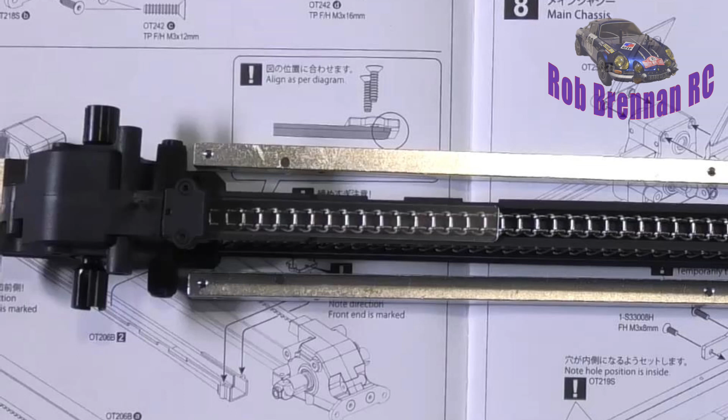Today we're going to be opening parts pack B, or should I say I've already opened parts pack B, and we're going to do steps 5 and onwards until I get to the end.

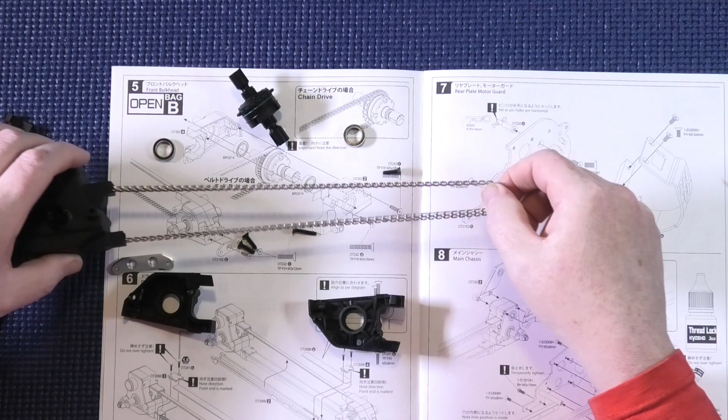Step 5 is making up the front differential and getting the chain on. It should be fairly simple, he says, not being able to work out which one's which.

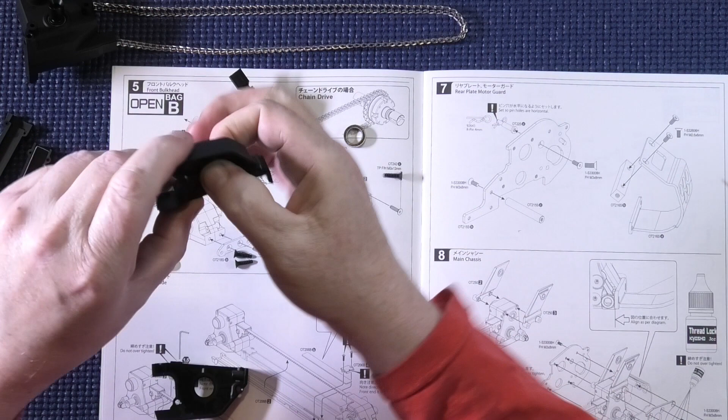Is that one? Yep. So to start with, it's just quite a simple case of inserting ball races into each side of the diff housing.

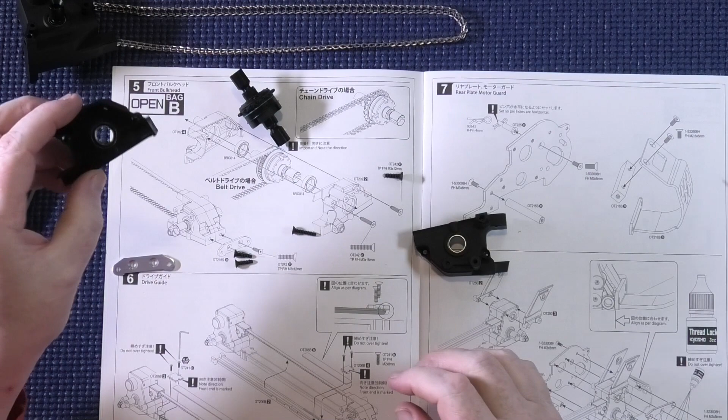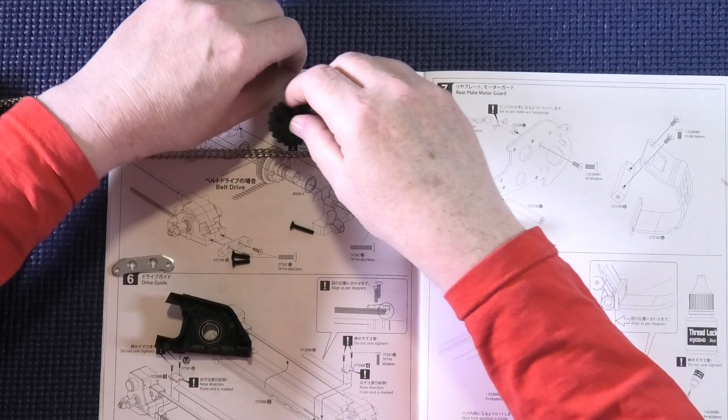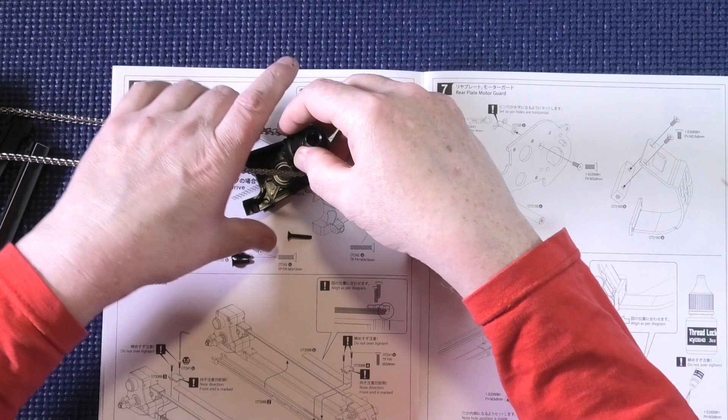And then the slightly more difficult bit is we've got to somehow, with only 2 hands, and also noting the direction of the diff, put the chain on, something like so, and then slide the diff in.

There we go. We've then got to join the other half. Wow, that's a tight fit on that bearing. There we go.

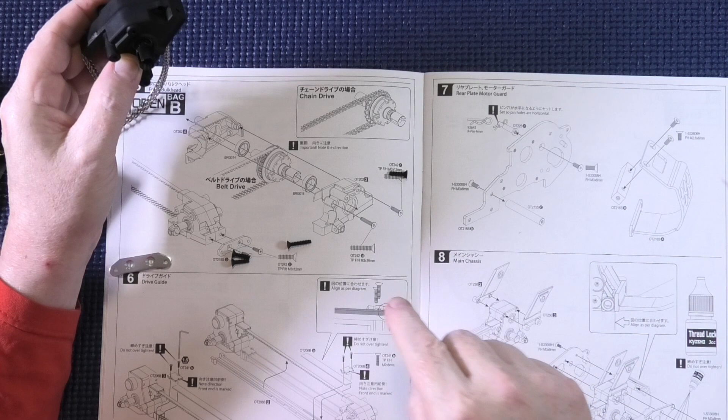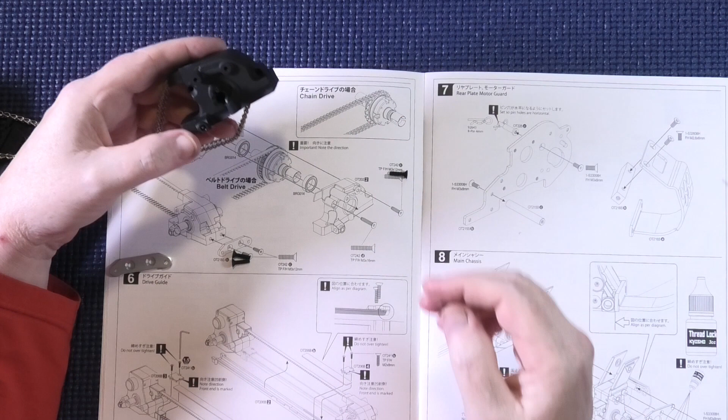And then we've got 2 screws so far. First one is a 16mm, which, looking at this, goes in there, does it? Yep. And the other side is a 12mm, both self-tappers, both countersunk.

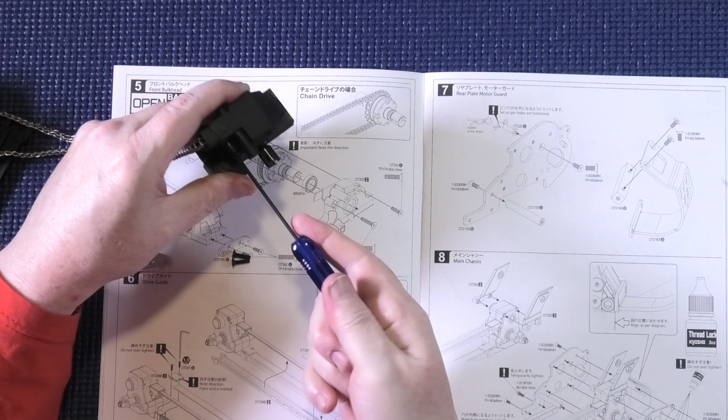I do quite like the idea of these being hex screws and bolts.

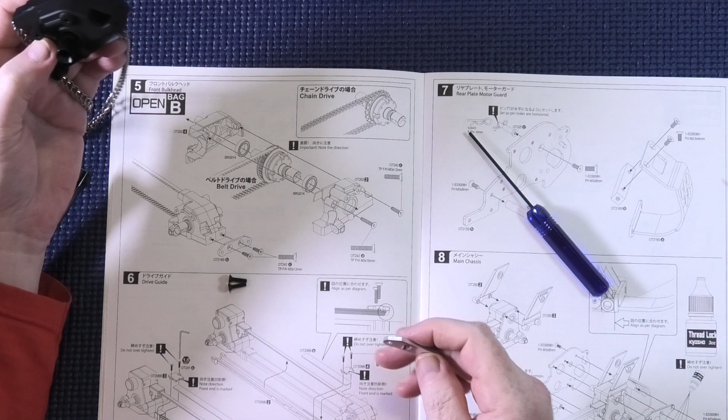And then we've also got this part here, which they're calling - I can't read because I haven't swapped my glasses - but that goes there with, again, 2 12mm self tappers, so that should hold the rear of the diff together.

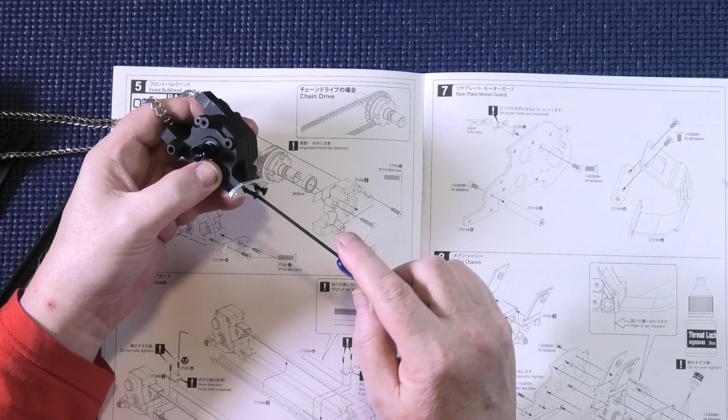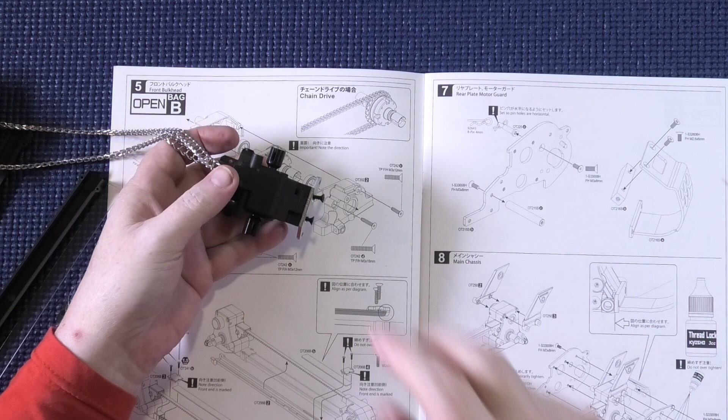And once you've tightened them up, you could move on to step 6. So I'll carry on and do that and join you shortly.

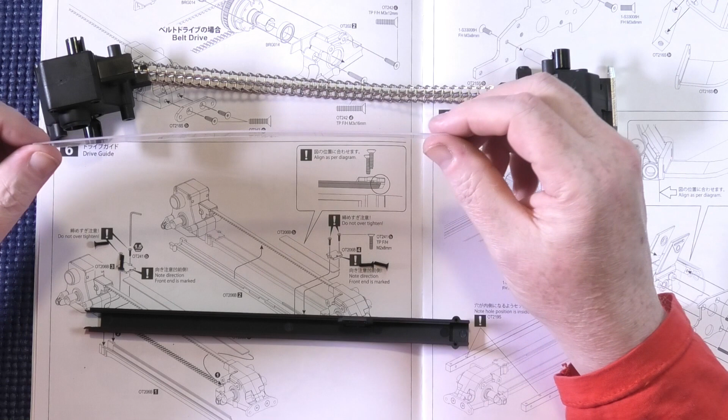Step 6 is installing the drive guides, and we've got a top and bottom one. I think that's the top one, and this one is the bottom, and we've got a long strip of hopefully polycarbonate.

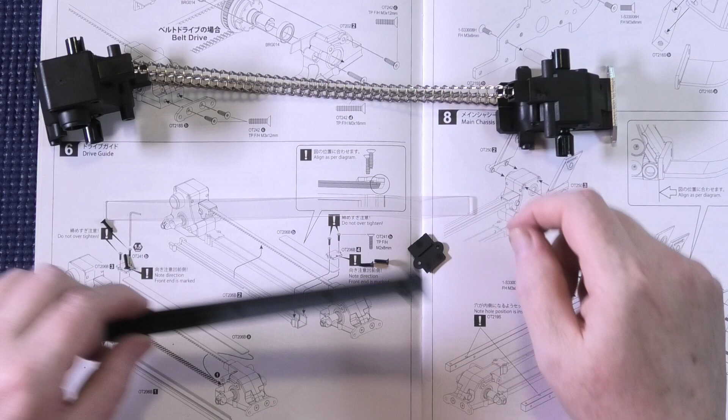And a retaining plate, I would imagine, and the bottom of the guide itself. And from looking at this goes on something like that. I'm assuming that just clips in like so, and then that possibly slots in.

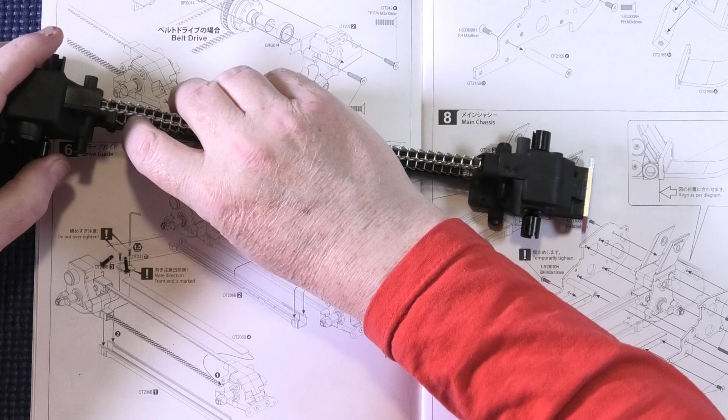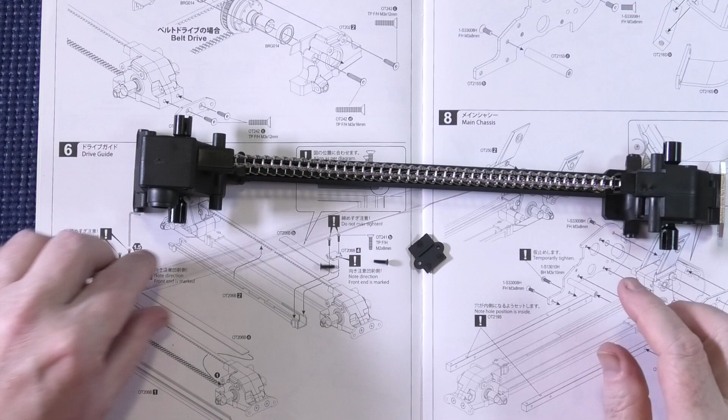Could do. There we go. And this little beast, I believe, sits on top, and I do apologise if my horrible bald head is getting in the way. There we go.

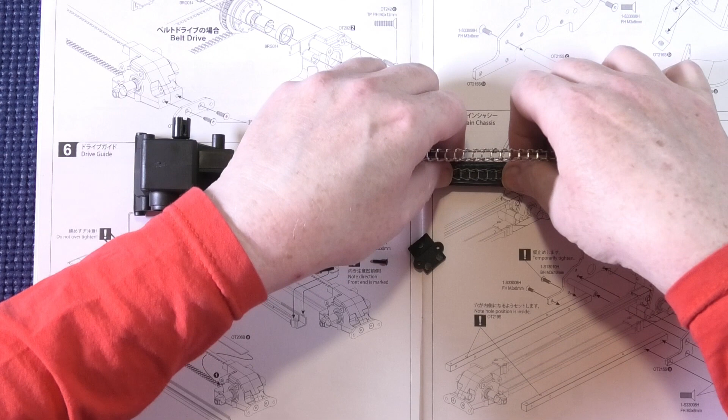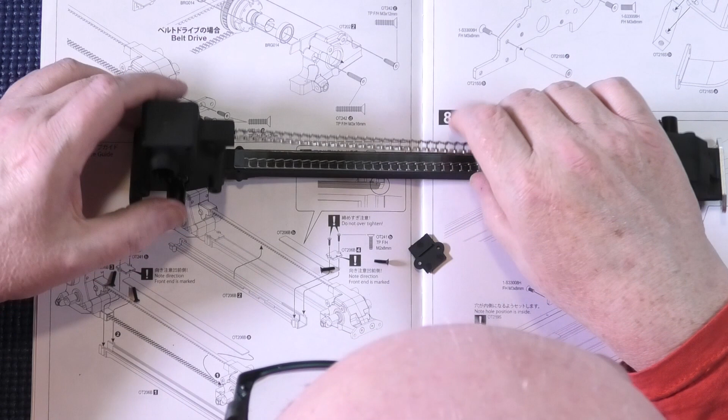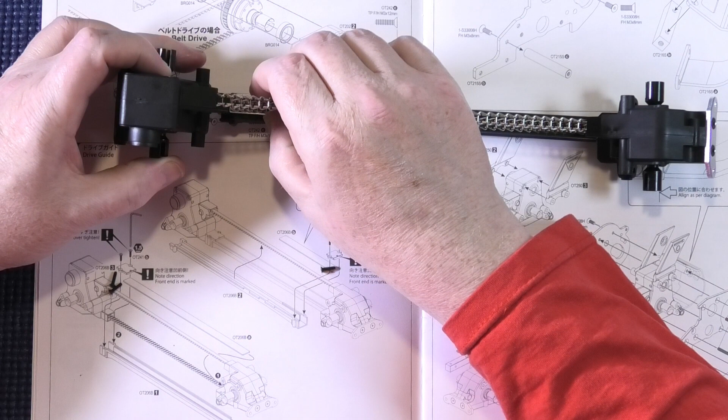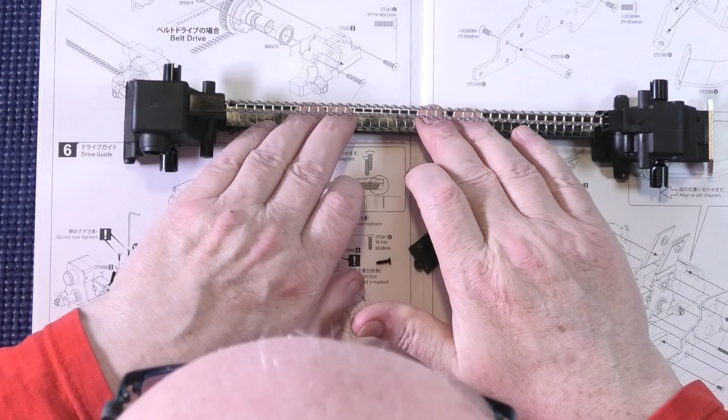Now, what I'm not sure of at this moment in time is, I think, this polycarbonate - does it go in? No, it won't sit inside, so it's obviously meant to go on top. Possibly something like so. Seems a bit weird.

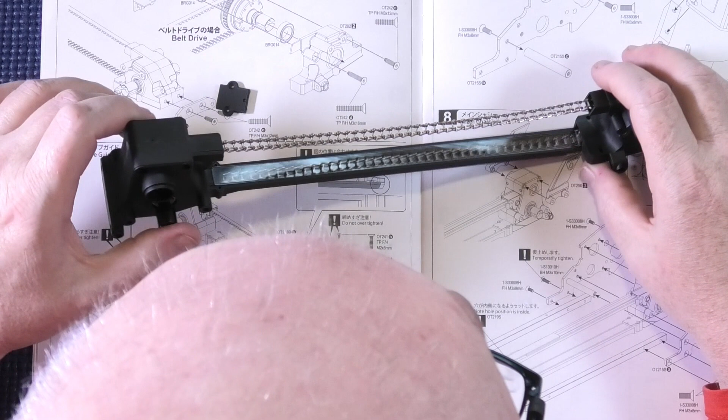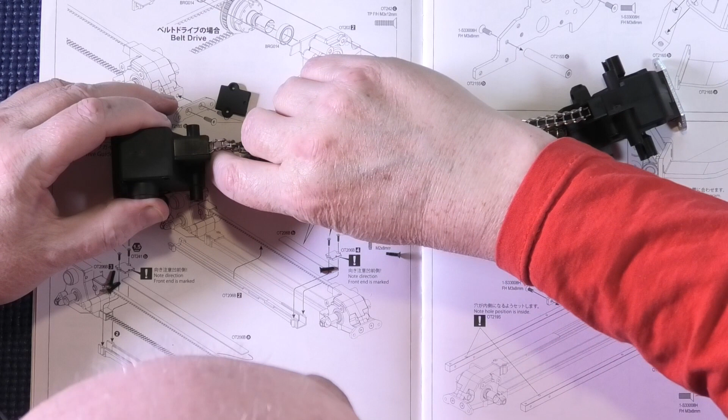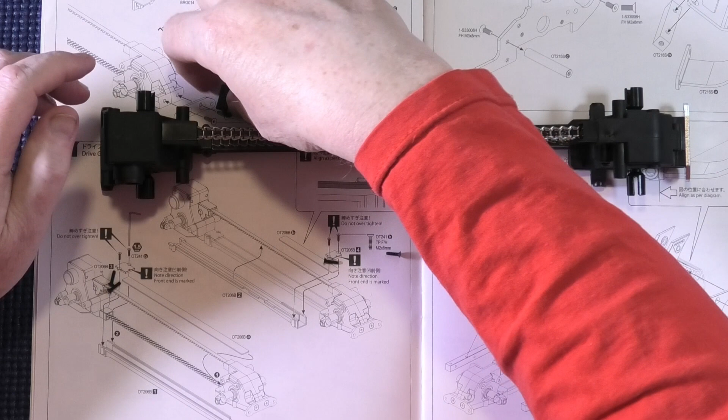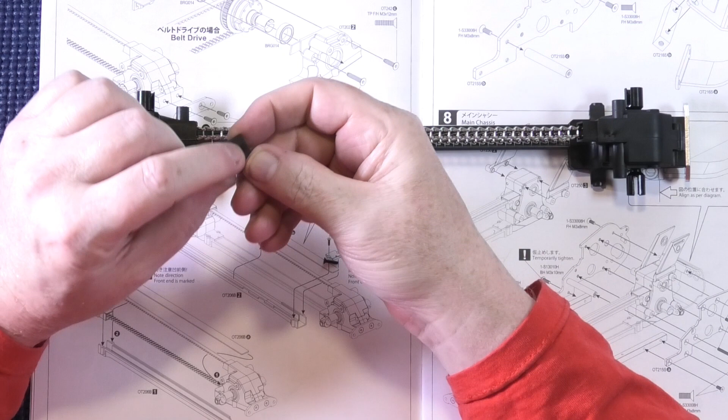I think it slides forward. Whoa! Just something round about there. Yeah. Now this one has something sticking down in it.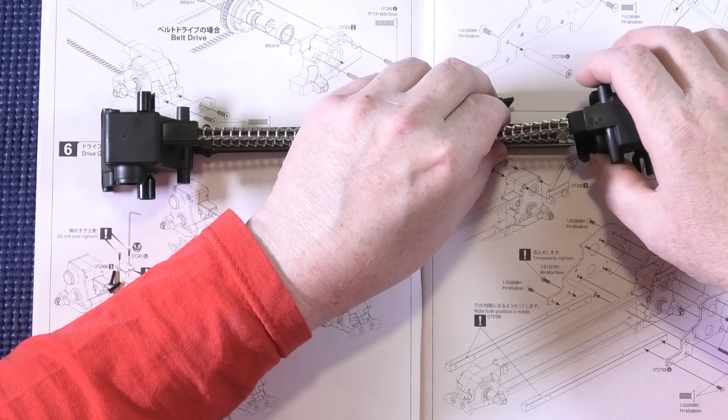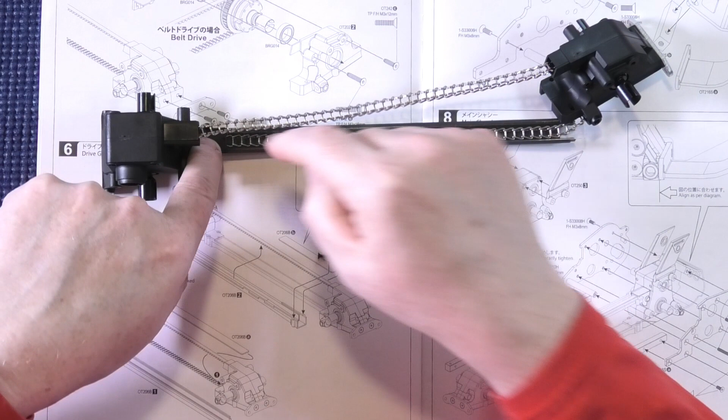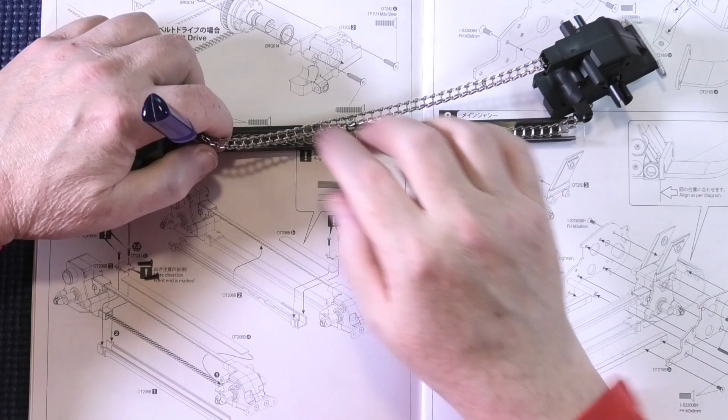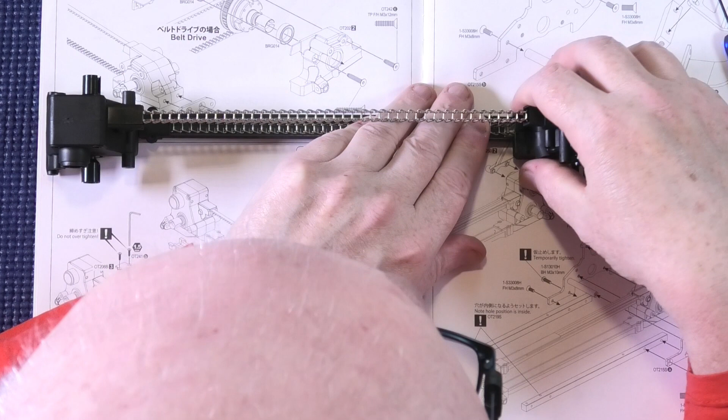I think this is blooming tricky, this is, if this is what happens. Right, so I do think you need that gap. Right, so let's see if this works then. Come on. Right, so that's that one.

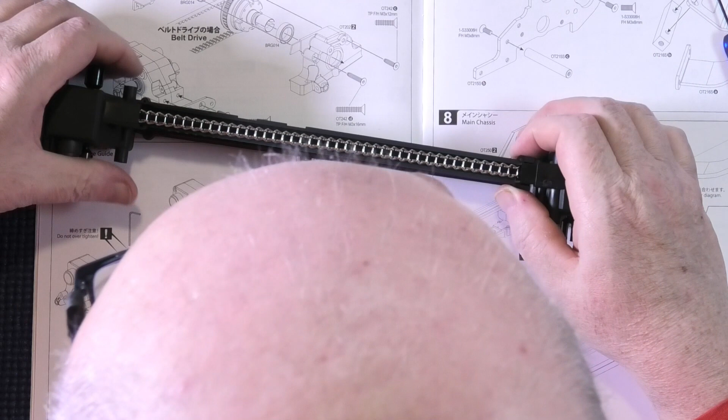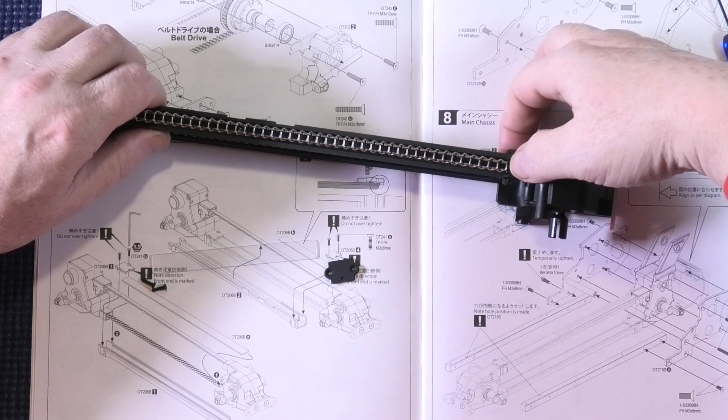And then for the top, we've got this one, which, by the looks of this, is going to be a tight fit. Well, that can't be right, unless you twonk - you got it the wrong way blooming round, don't you?

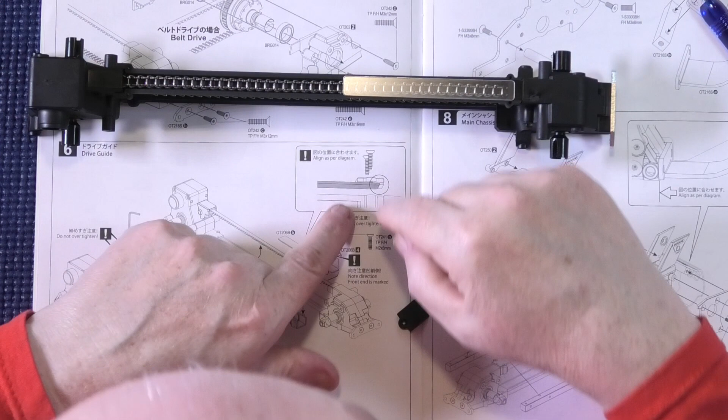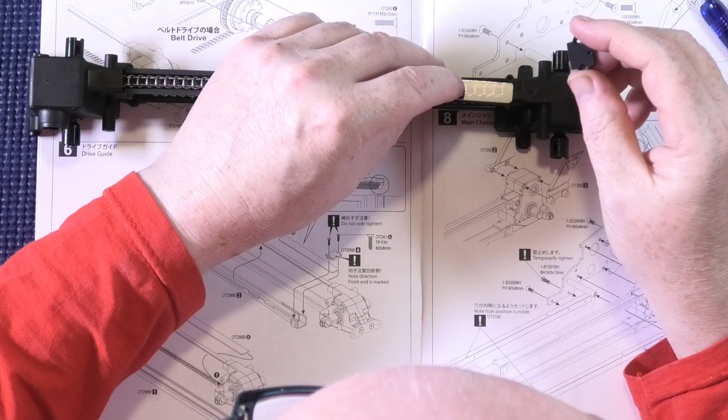Oh, look. Oh. I don't know. Now there's a note here which to me shows you're putting this bit of polycarbonate over there and then screwing that down.

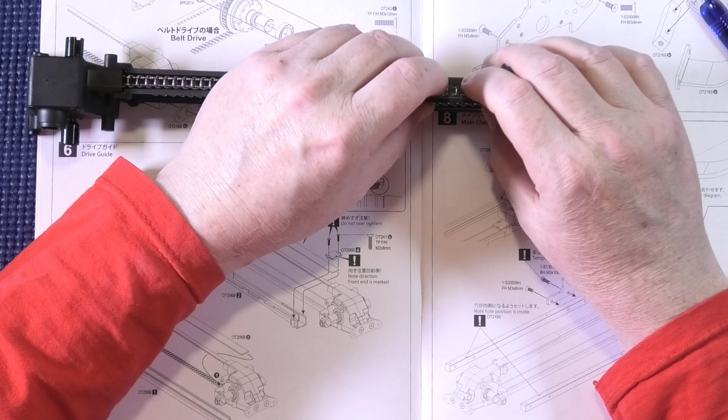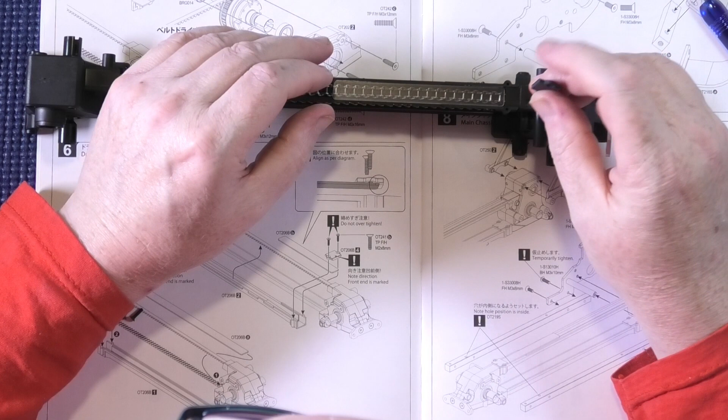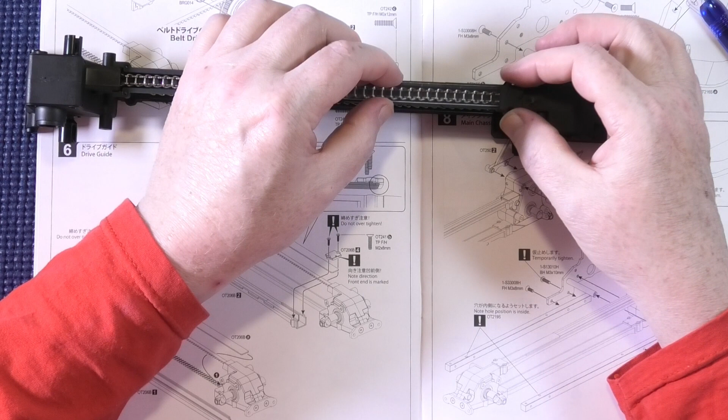Because I think if you put it in there, where I think it should go, and clip in, but then there's basically nothing holding that in, which seems a bit crap. I don't know why they couldn't have done it all the way along, like the bottom one, and why there's that channel either side. But hey, we'll do it as it says to.

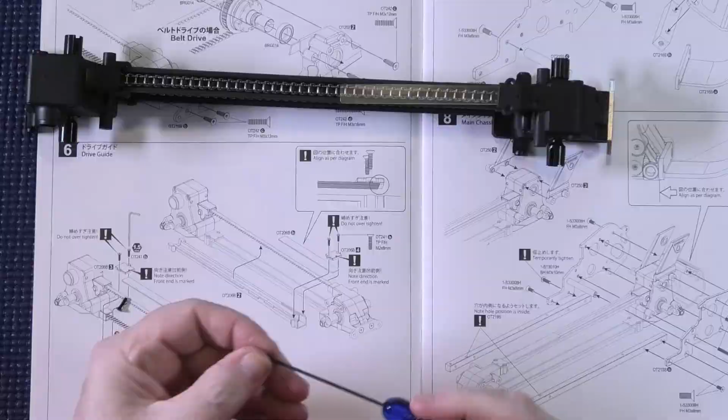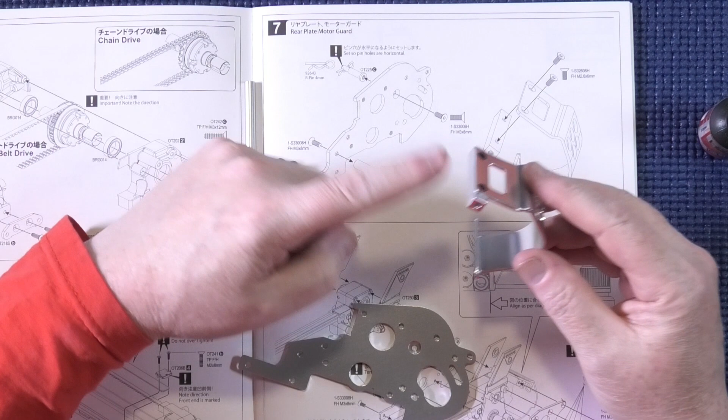Okay, so step 6 done. Let's crack on to 7. Step 7 is rear plate motor guard. This little bit of aluminium here, along with this piece, and this OT216SB, and then we've got this other rod which goes through there, and this R-clip mount.

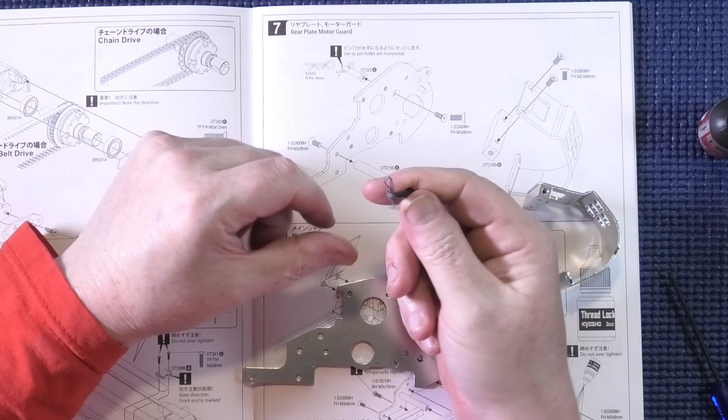They're all metal on metal, and although it doesn't tell me to start using thread lock until step 8, I don't care, I'm going to use thread lock because it's bleeding metal on metal. So let's get them started.

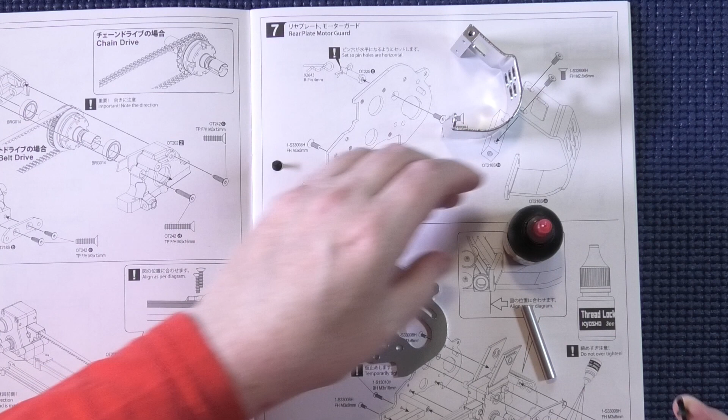Put on the thread rather than the other side on the hole, except nothing's coming out. There we go. And get rid of that excess, poke it through, and then start screwing it. That's about horizontal, I think it says horizontal, yeah. Nice and tight, wipe off any excess.

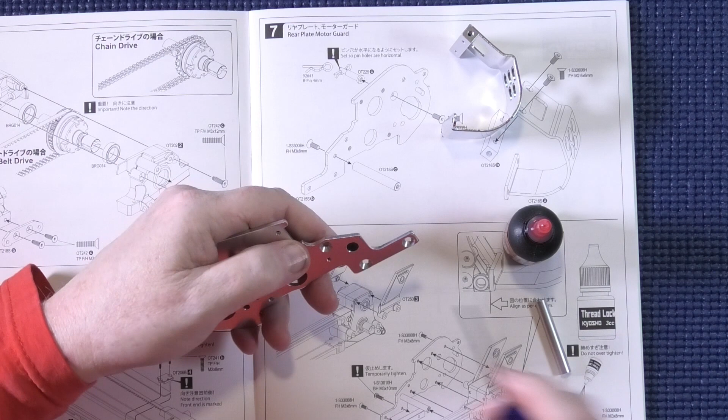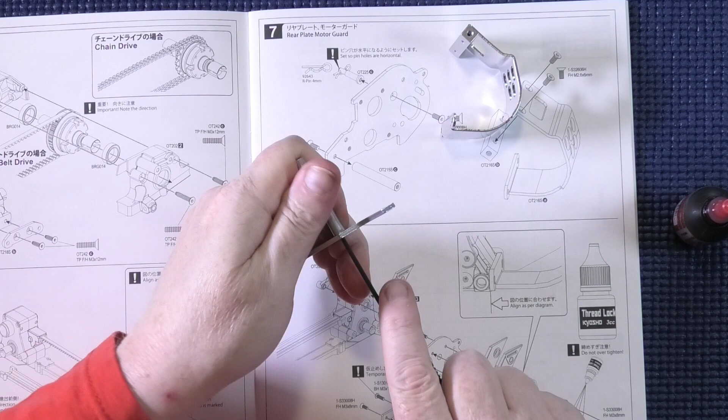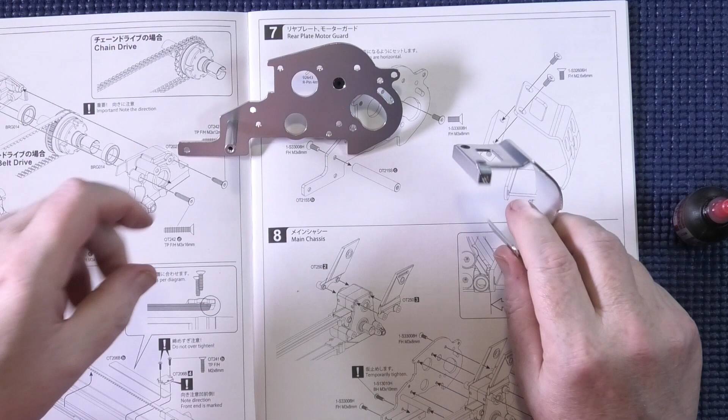And then we come to this side and it's that one. And again, a squeeze of thread lock, not too much. And lock it in position as best as you can. As you can see, I've already done this step, and again I've used thread lock, so we can get ready for step 8.

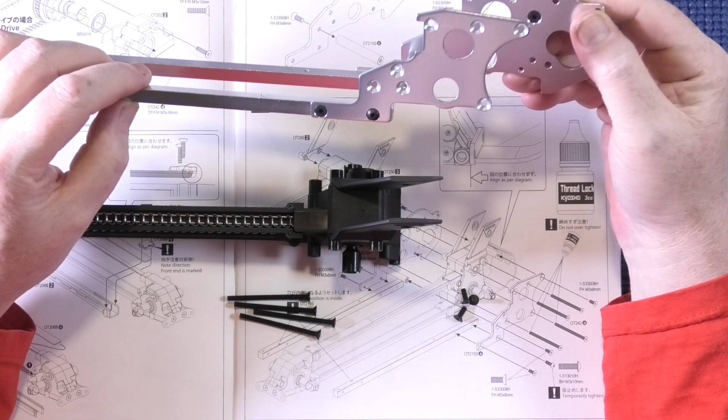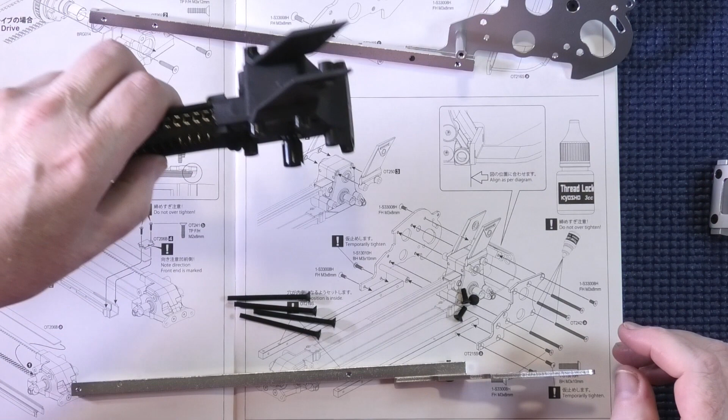Step 8 is making up the main chassis, and we're needing both these two rear motor guard plates, blah de blah, and the two chassis rails. They're all aluminium, and obviously we need the chain drive, and we've got these two bits here which I think are for the rear wing, and I keep doing that.

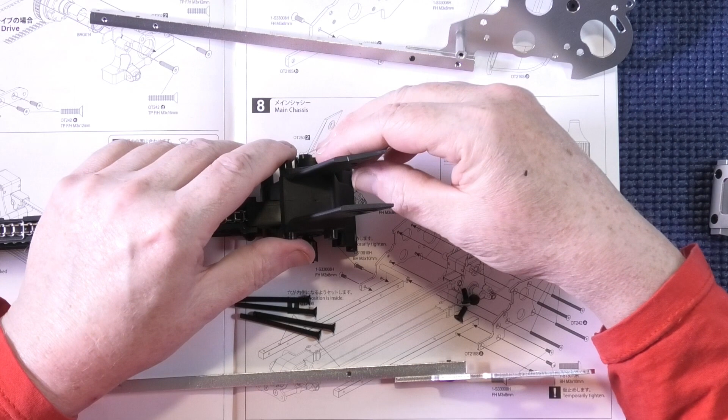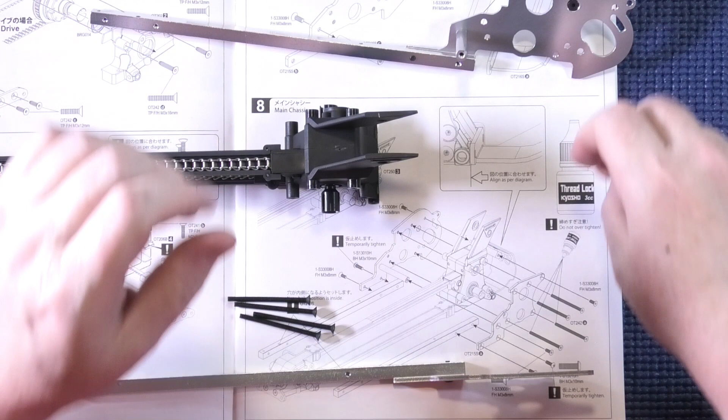The sooner I can get that tightened up the better. And these, as you saw, sort of clip in and just about hold if you get it in the right place. But yes, I think I may need 3 hands, but we may be alright because these things are massive.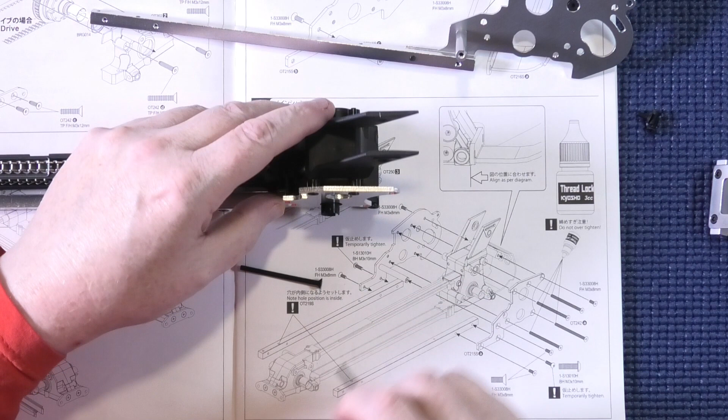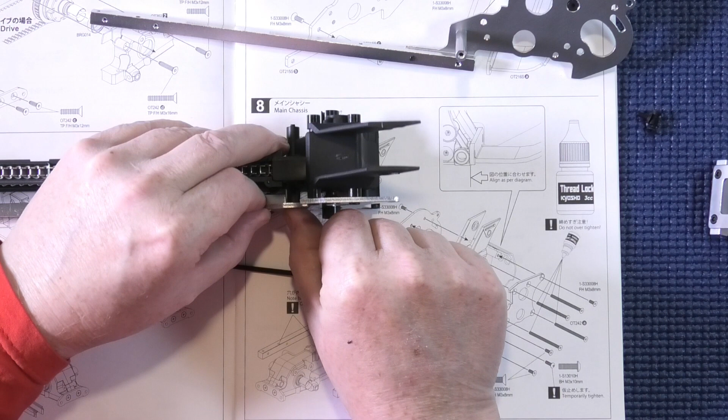So I think what we just do is start poking these through to hold this side together, if I can work out exactly where they go. Somewhere there. Have I got to lift it up a bit? Yep. Oh my goodness me.

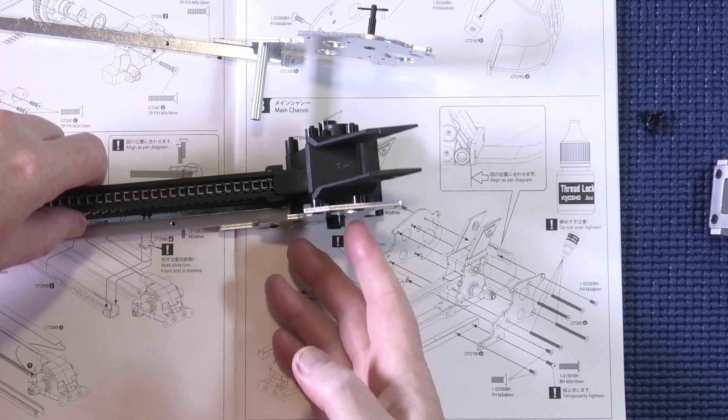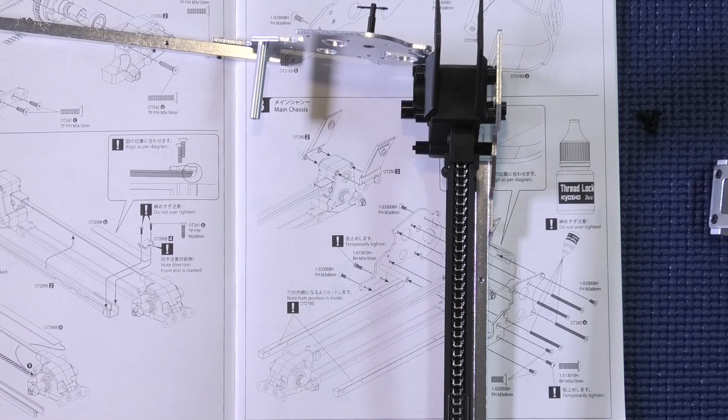Oh, they aren't that long, are they? Look at how much there's left poking out. Not much at all. But hey. Right, so what I need to do now is swizz it all round. I'm sorry to Kyosho, but that's beginning to get on my nerves now.

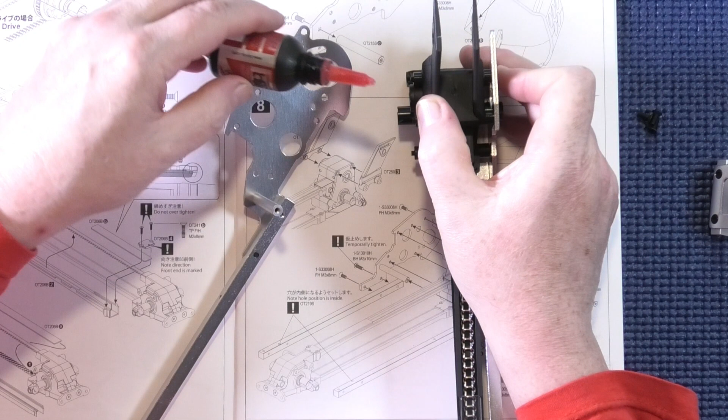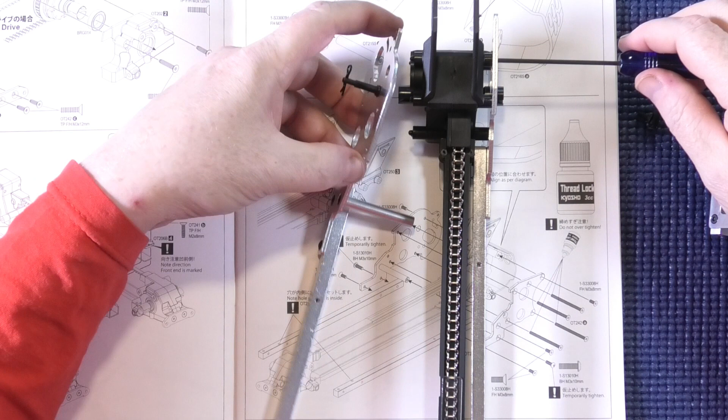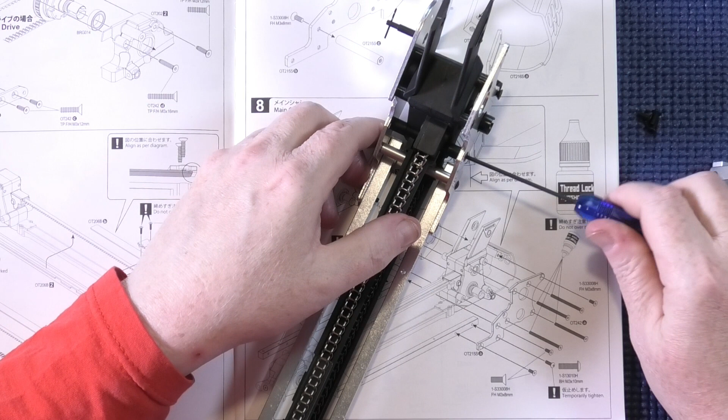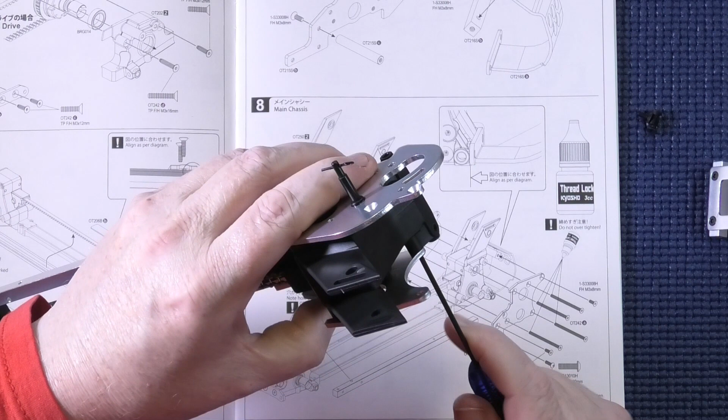So hopefully first hole is through there and there. And then that one. And that one. Are you going in? Yep. And finally that one. I don't like the look of that. That felt like it's tightening up too quickly.

It's better. And it does say not to over tighten, because I'm assuming you might strip the aluminium thread. But there we go.

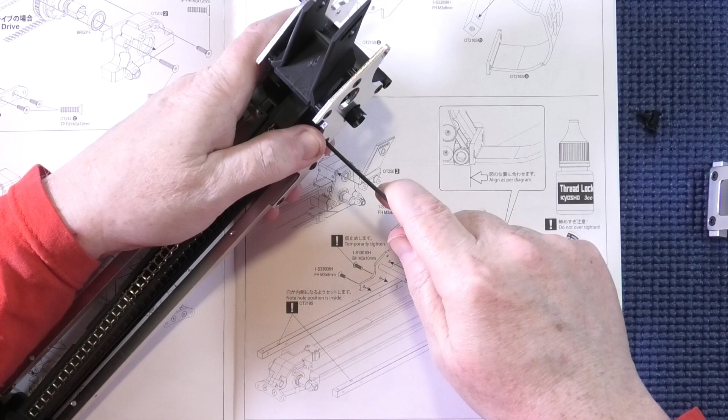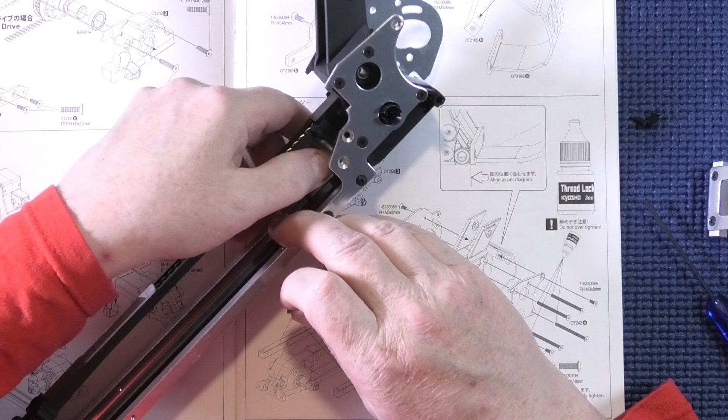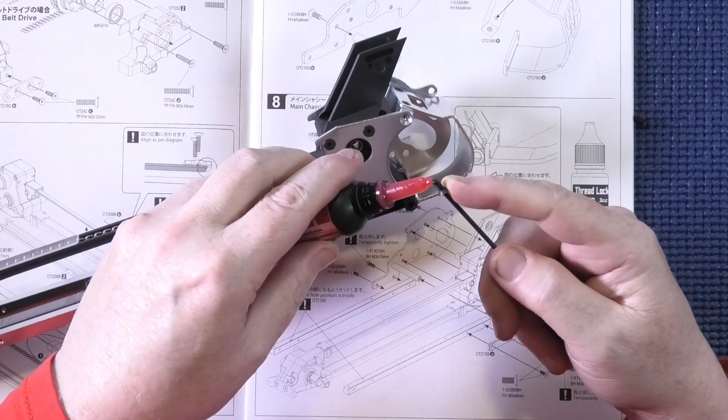That's that in. And then we just need one of these through there, and a bit of thread lock on again, and then if we can get it in place, in position, we need this one screwing together.

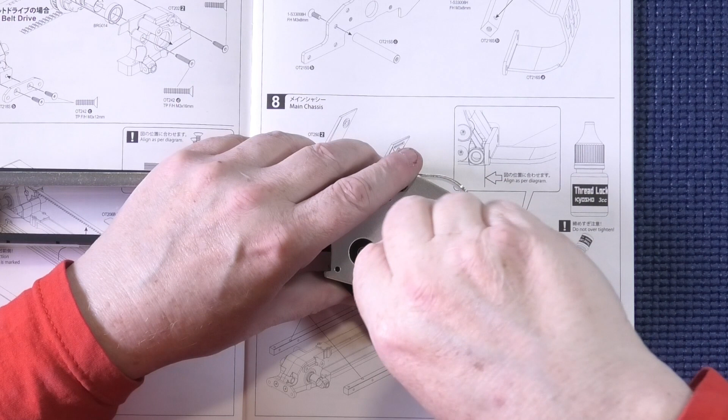There we have step 8 complete, and sort of looking like a chassis, maybe a truck chassis, but hey, so we'll have a look at what step 9's got in store for us.